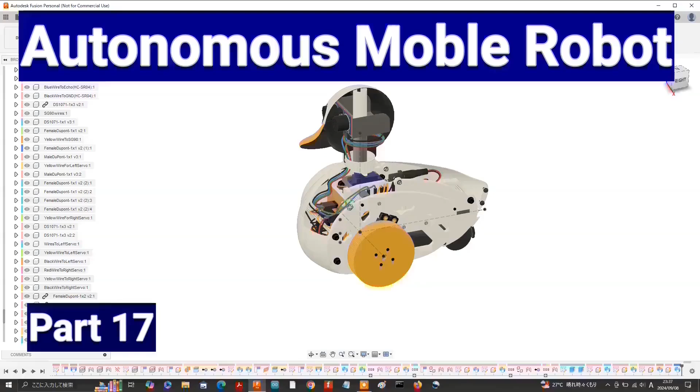Welcome back to part 17 of my DIY autonomous mobile robot building series. Today, using Fusion 360, we will create a 3D model of an HC SR04 holder and rotatably mount the HC SR04 holder so that it can turn to the left and to the right.

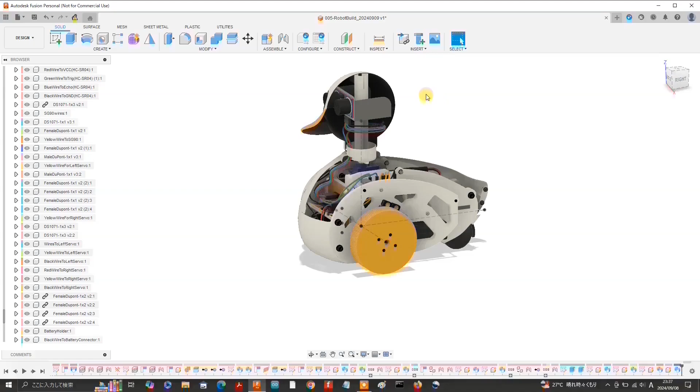Carrying on from part 16, our next mission is to get the HC SR04 to rotate with the servo horn of the SG90 micro servo. If we go to the SG90 in the browser, open up the joints folder, which unlike in this footage is inside the relationships folder if you're running the latest version. Right click on Revolute and select animate joint relationships.

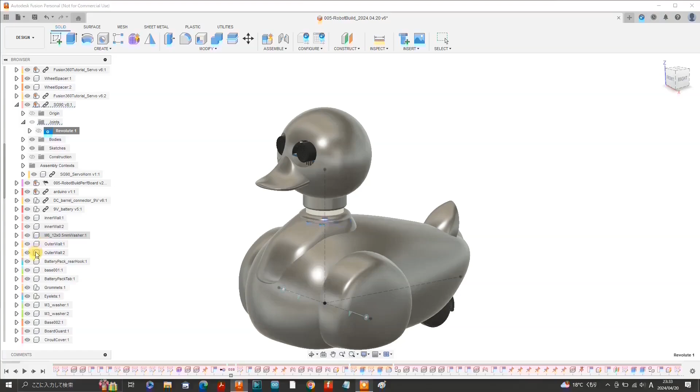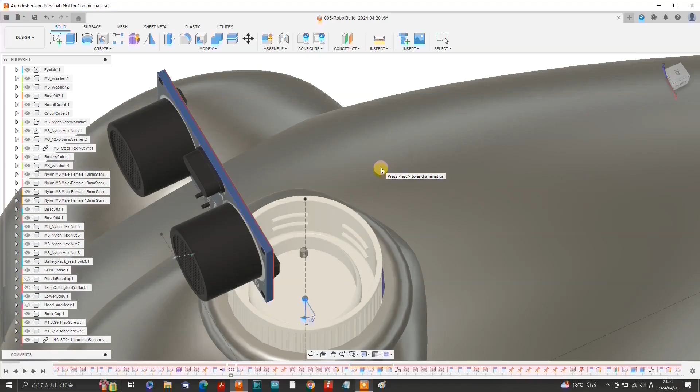So the SG90 micro servo is rotating as it should, but the HC SR04 together with the head remains stationary. Let's hide the head and neck and take a closer look. Hide the plastic bushing. The bottle cap is not rotating together with the servo horn of the SG90. The screws which penetrate through the bottle cap are rotating together with the servo horn as though the base of the bottle cap is made out of liquid. This is because the bottle cap is only sitting on top of the servo horn and is not joined onto it properly. So the footage has jumped ahead with the SG90 micro servo isolated.

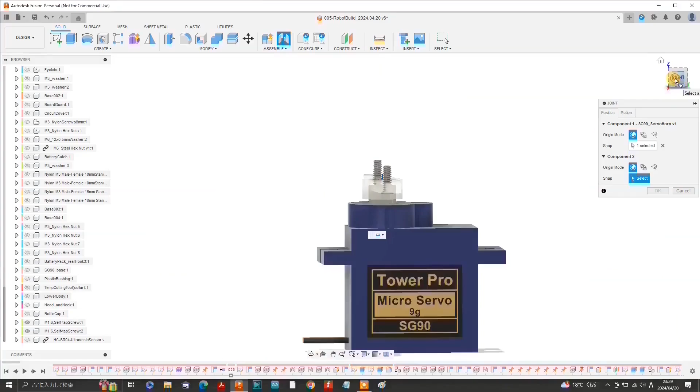Go to Assemble and select Joint. Then select the center snap point at the rotational center of the servo horn on the plane that lies on the top surface of the servo horn. Then swivel the SG90 to a lower angled view, unhide the bottle cap, and select the central snap point on the underside of the bottle cap.

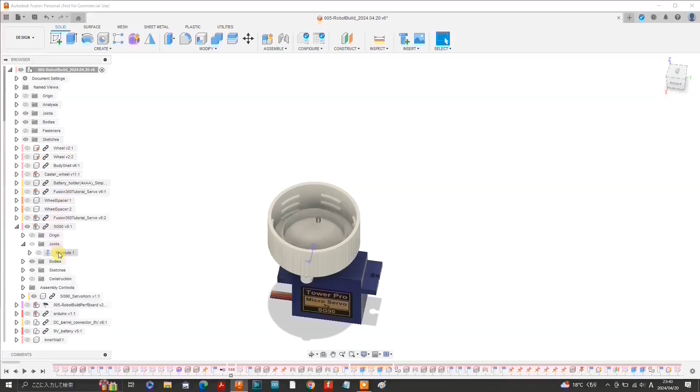Hit OK. Let's go to the Joints folder and label the newly created joint horn to bottle cap. Hide the joint, go back down to the SG90 in the browser, right click on Revolute and select Animate Joint Relationships. And there we can see the bottle cap is now rotating together with the rotating servo horn. Here the footage has jumped ahead with the SG90 micro servo unisolated.

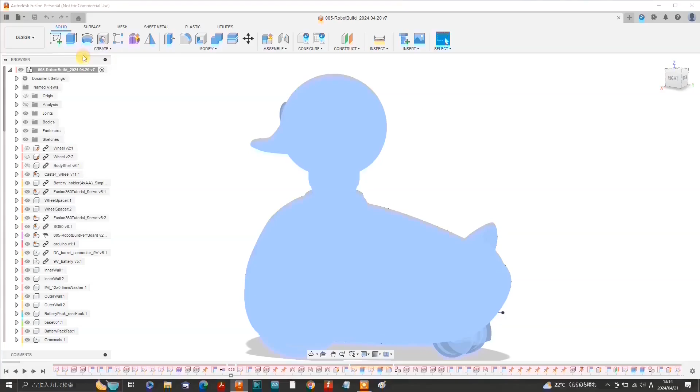So the next step is to create an HC SR04 holder. Create a new component and label it HC SR04 holder. Move to the rear view by selecting back on the view cube, and here we have the rear side of the HC SR04. Select new sketch and then select the rear face of the HC SR04.

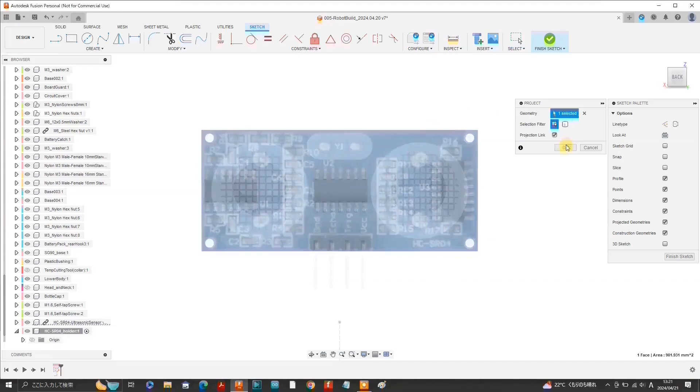Press P to project and select the rear surface of the HC SR04 to project the shape of the rear surface, including each mounting hole at each corner. Select the circle tool and sketch a 7mm diameter circle centered at the top left projected mounting hole, and do the same at the other 3 projected mounting holes.

Grab the line tool and sketch a line parallel to the long side of the HC SR04 at an arbitrary length, but longer than the width of the HC SR04. Then use the tangent tool to make the line segment tangent to the 2 circles, and use the coincident tool to make each end point of the line segment coincident with each circle. Do the same for the other 3 sides of the HC SR04.

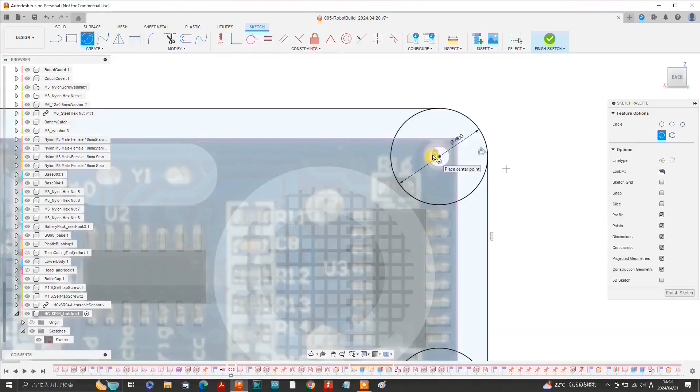Select the circle tool again, go to one of the corners and sketch a 3.5mm diameter circle centered at one of the mount holes. Do the same at each of the other corners.

Next, zoom up to one of the corners, select the line tool and sketch a vertical line from the top edge to a position just past an approximate tangent position relative to the 3.5mm diameter circle. Grab the tangent tool and make this line segment tangent to the 3.5mm diameter circle, and then use the coincident tool to make the end of the line segment coincident with the circle.

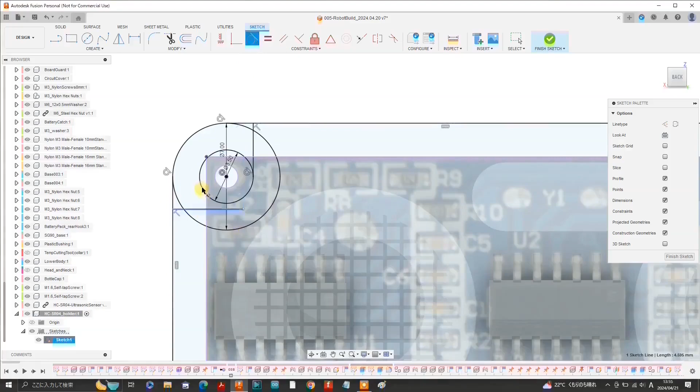Select the line tool again and sketch a horizontal line from the left edge in the same manner, and use the tangent tool and the coincident tool again to make the horizontal line segment tangent to and coincident with the 3.5mm diameter circle. Then do the same at each corner.

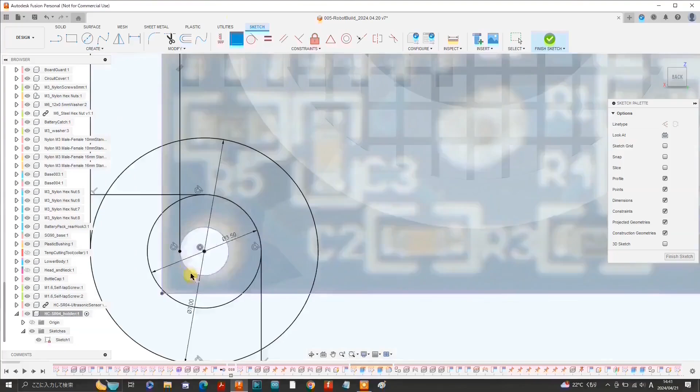Here the footage has jumped ahead. I have started by sketching a line segment close to a pair of projected mounting holes, using the tangent tool to make the line segment tangent to the pair of mounting holes, and using the coincident tool to make each end of the line segment coincident with each corresponding mounting hole. Do the same with the other pairs of projected mounting holes and finish the sketch.

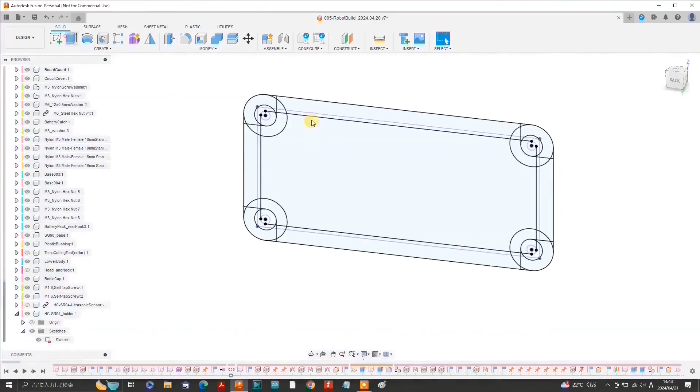Hide the HC SR04, select Extrude, and proceed to select all the various portions that will constitute the holder frame of the HC-SR04 holder. Extrude by 0.5 millimeters. Okay, let's unhide the HC-SR04.

Here the footage has jumped ahead to where we have a section analysis in the lateral plane or XZ plane, here at a distance of 18.5 millimeters along the y-axis from the origin.

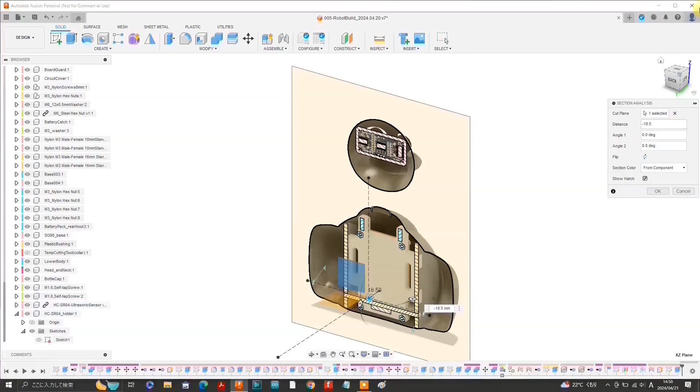As you can see, the 4-pin header near the bottom interferes with the holder frame, so let's make a notch out of the frame to accommodate that.

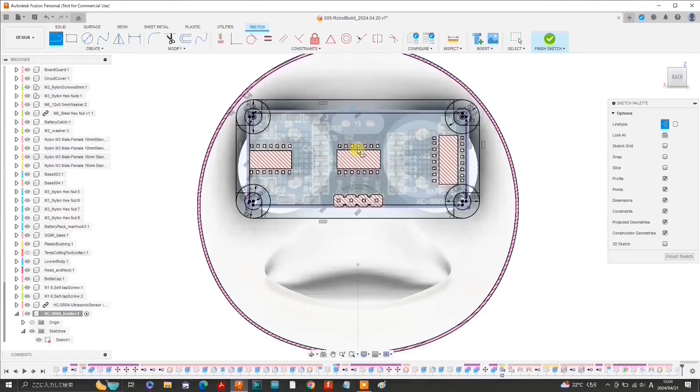Unhide the sketch and right-click and select Edit Sketch. Select the line tool, change the line type to Construction, and sketch a vertical construction line down the center, right down to the bottom edge of the projected perimeter of the HC-SR04.

Change the line type back to Solid and sketch a horizontal line segment along the bottom edge to the left, and set the length to 5.1 millimeters. Sketch a short vertical line from there to the lower rectangular opening edge.

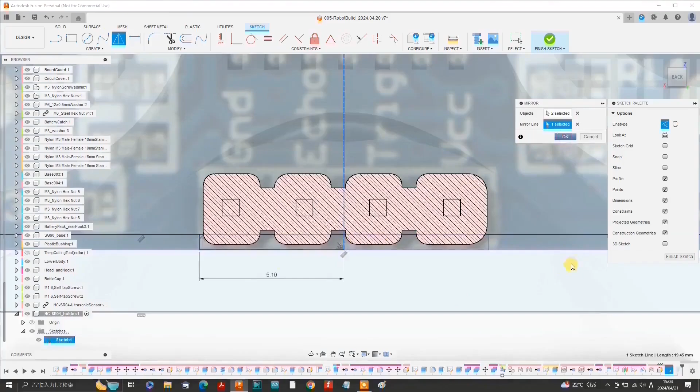Then use the mirror tool to mirror the horizontal and vertical line segments by selecting both of these lines as objects and selecting the vertical construction line as the center line. Finish the sketch. Hide the section analysis, hide the head and neck component, and hide the HC-SR04.

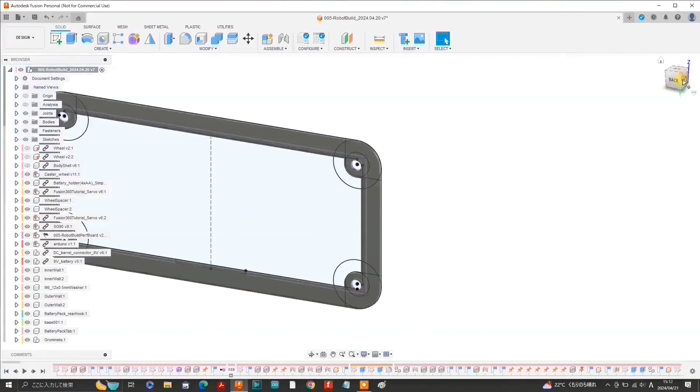I tried to extrude or cut out the notch by selecting the area defined by the line segments, but the sketch itself is located on the other side of the original extrusion, so we first need to turn the design around before selecting the area to be cut. Select the area of the notch and extrude as a cut operation by 0.5 millimeters.

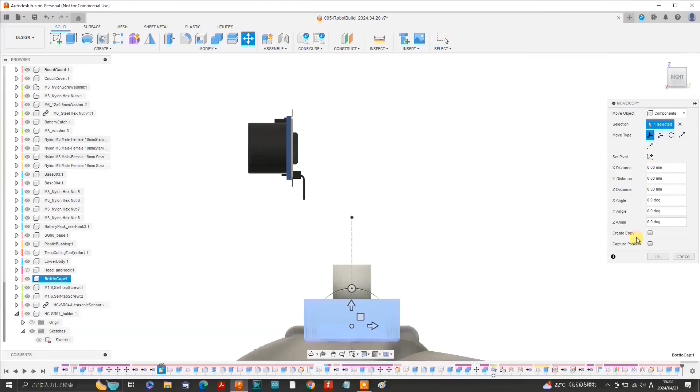Hide the sketch. Here the footage has jumped ahead with the HC-SR04 unhidden and with the Move Copy tool activated on the bottle cap. So I initially created a copy of the bottle cap as a supporting surface for the HC-SR04 holder. However, I ended up not being able to use this extra bottle cap due to space restrictions, which I will show you why very soon.

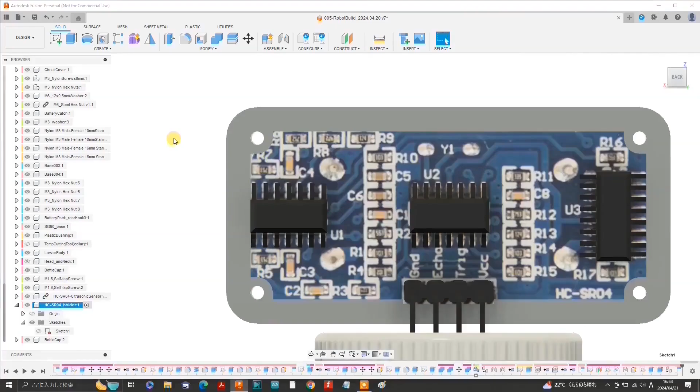Go back to the rear view, zoom up a bit and activate the HC-SR04 holder. Select the frame we created earlier and create a new sketch. Press P to project. Select the frame to project the entire frame we have sketched. Select the top face of the second bottle cap and hit OK.

Select the line tool and sketch a vertical line from the start point of this curve down to an arbitrary point lower than the top of the bottle cap. Then sketch a horizontal line on the left side that crosses this vertical line.

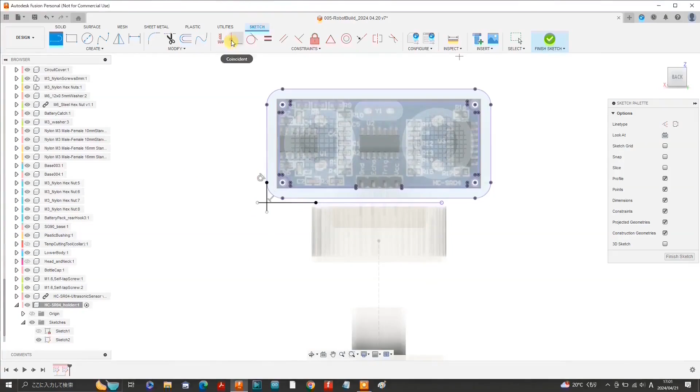Then use the coincident tool to make the left horizontal line coincident with the vertical line. Then do the exact same thing on the lower right side. Select the line tool again and sketch a 0.5 millimeter line inward from this point where the top left outer curve starts.

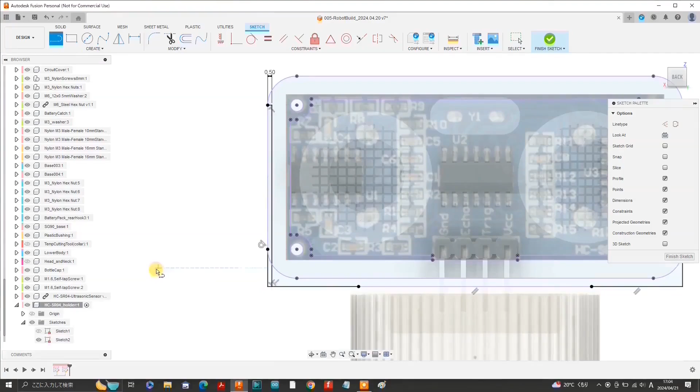Select the line tool again and sketch a vertical line from the end of the 0.5 millimeter line segment down to the lower horizontal line we have just sketched. Then do the exact same thing on the right side.

Next, change the line type to construction and sketch a 0.5 millimeter construction line from what will be the bottom of the HC-SR04 holder. Select the line tool, change the line type back to solid, and sketch a horizontal line from the top of the 0.5 millimeter construction line we have just created over to the left side.

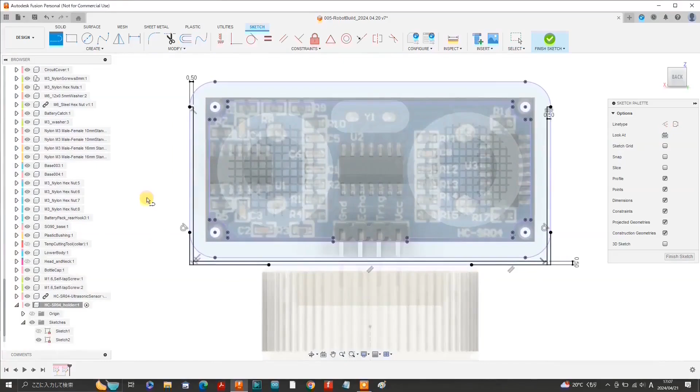Finish the sketch. Select the sketch profile that defines the right side wall. Select the extrude tool and continue selecting the profiles of the HC-SR04 holder to be extruded. Then extrude by 40 millimeters.

Activate the main design. I forgot to activate the HC-SR04 holder when I extruded the frame body. As you can see, when we hide body 13 in the root or main folder, the frame around the HC-SR04 disappears. So this is the body we need to move to the folder for the HC-SR04 holder.

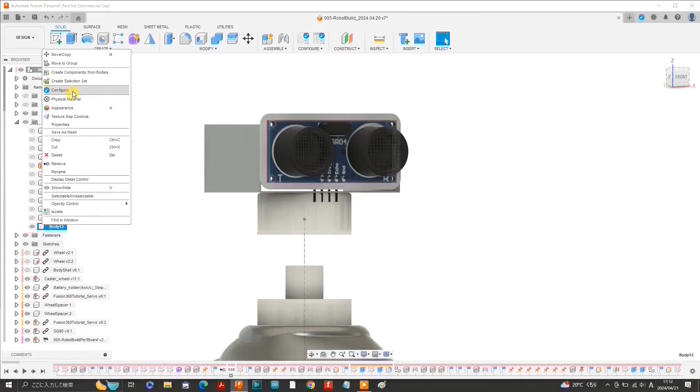Right-click on body 13 and select Move to Group. Scroll down to the Bodies folder of the HC-SR04 holder. Select Target Group in the Move to Group palette. Then select the Bodies folder of the HC-SR04 holder. Then hit OK, and there we can see the body added to the Bodies folder. Unhide Sketch 1 and Sketch 2.

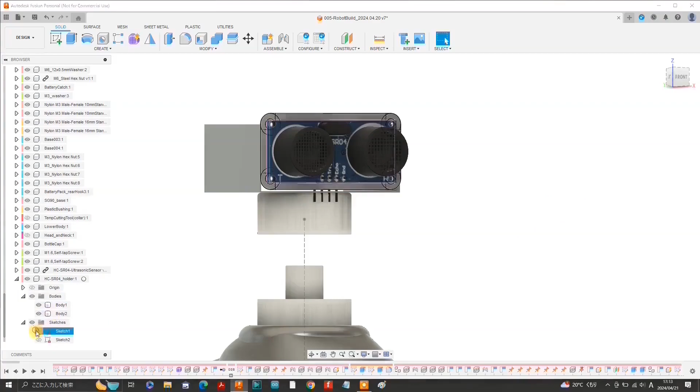Change to the front view and activate the HCSR04 holder component. Select Extrude and select the remaining profile portions at the lower end of the frame defined between the frame on the base and sides, and extrude by -0.5 millimeters. As you can see in the palette, the operation has automatically changed to join, so we can just hit OK.

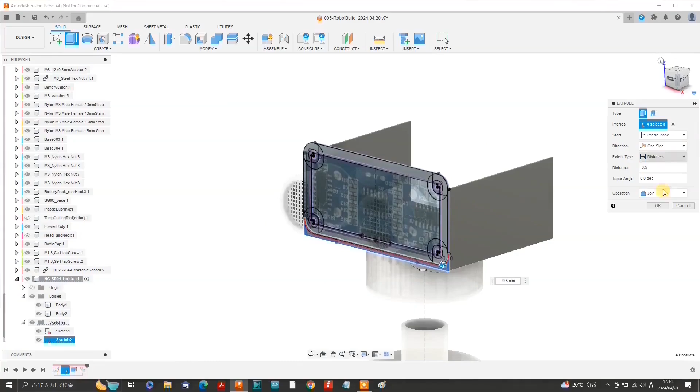Hide Sketch 1 and Sketch 2 of the HCSR04 holder and activate the main design. Select the corner edge defined by the vertical front wall or frame and the horizontal base. Select the fillet tool and apply a 1mm fillet and hit OK.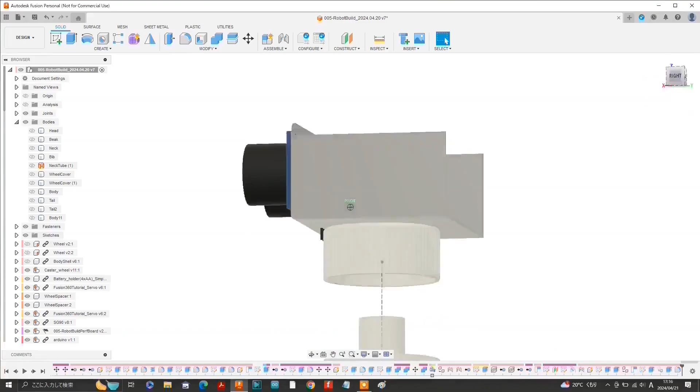Next, zoom into the inner corner edge on the inner side, apply a 0.5mm fillet and hit OK. Select each top rear corner edge of the side walls, select the fillet tool and apply a 10mm fillet to those corner edges.

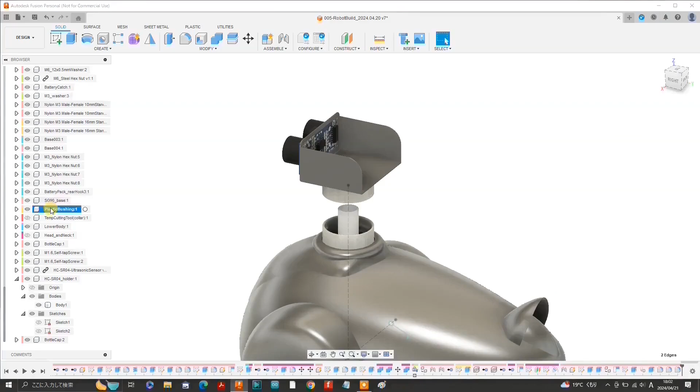Before we carry on, let's make sure the plastic bushing will rotate with the bottle cap and servo horn by joining the plastic bushing to the bottle cap. Right click on the plastic bushing in the browser and isolate the plastic bushing, and use the joint tool to join the center of the bottom of the plastic bushing to the center of the inner side of the bottle cap.

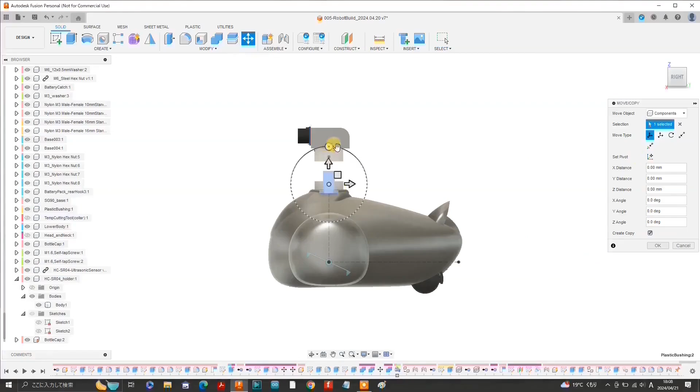I label the joint bushing to bottle cap, then unisolate the bushing. Select the plastic bushing in the browser, select the Move Copy tool, and check Create Copy on the Move Copy palette. Rotate the copy of the plastic bushing 2 by 180 degrees.

I actually hit return, but I could have also continued as I was. Move plastic bushing 2 up a bit. Just hit OK, because that is probably the most we can do with the Move Copy tool. Then right click on plastic bushing 2 and isolate it.

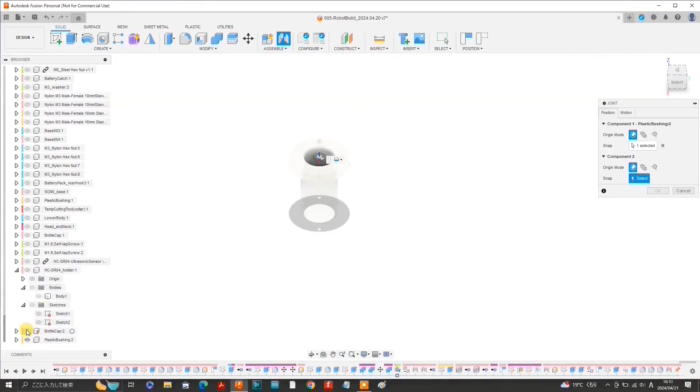I use Joint from Assemble to join the top side of the upside down plastic bushing 2 to the inner side of the top bottle cap. However, as I mentioned earlier, I ended up not using the top bottle cap, as you'll soon see. Right click on plastic bushing 2 and unisolate it.

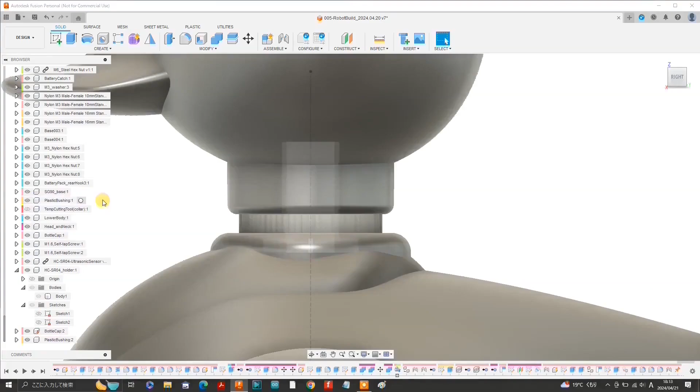Here the footage has jumped ahead a bit. Unhide the head and neck, and I need to unhide plastic bushing 1 in the footage here. Unhide the section analysis. Unhide the front to rear cross section that we have previously made.

Zoom up to where the two plastic bushings meet, and I think you can see that the two ends of these plastic bushings interfere with each other. Select Measure from Inspect and measure the distance between each end of the plastic bushings, and we get a distance of 0.836 millimeters, which is slightly smaller than the thickness of the top surface of the bottle cap.

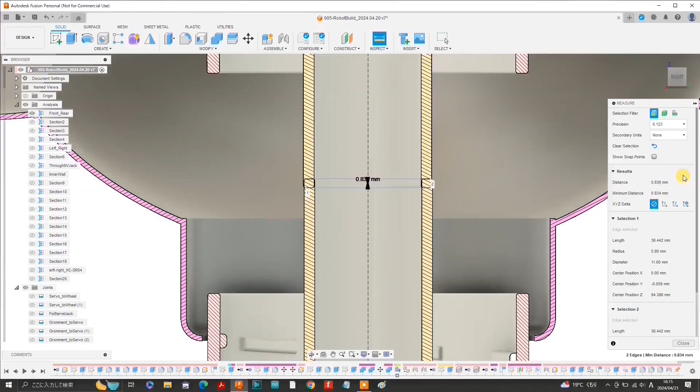Here the footage has jumped ahead, in which the second bottle cap has been removed and plastic bushing 2, which was joined to the undersurface of the second bottle cap, has dropped down to an arbitrary vertical position. Hide the section analysis and hide the head and neck component.

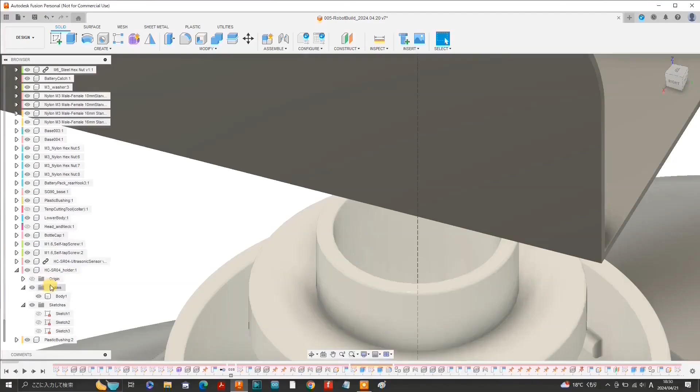Here the footage has jumped ahead and the camera has sped up while showing plastic bushing 2 being directly joined to the undersurface of the HC-SR04 holder using the joint operation from Assemble.

So zooming up to the upper and lower ends of the respective first and second plastic bushings, we can see a tiny gap, which is probably a perfect amount of clearance. I hid the joint and labeled it bushing to HC-SR04 holder.

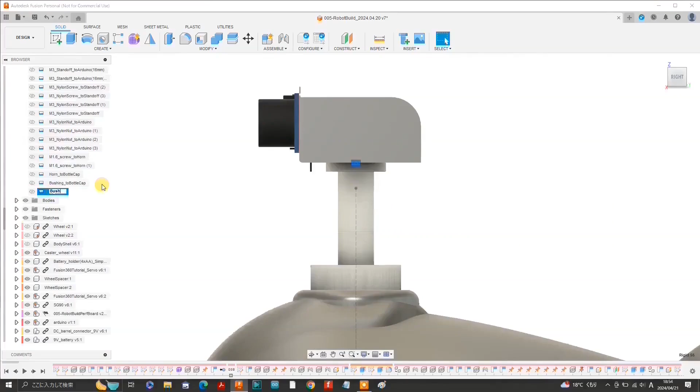Now let's create a connector tube that will integrally connect the two plastic bushings together. Create a new component and label it connector tube. Navigate to the top view, select a new sketch, and select the XY plane.

Select the circle tool and sketch a 12mm diameter circle on the origin. Then sketch a 14mm diameter circle and finish the sketch.

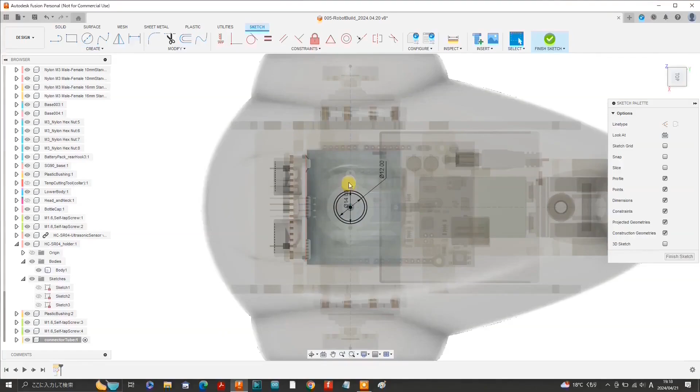Activate the main design, select Measure from Inspect. Measure the distance between the flange portion of the upper plastic bushing and the flange portion of the lower plastic bushing, and we get a distance of approximately 40.6 millimeters.

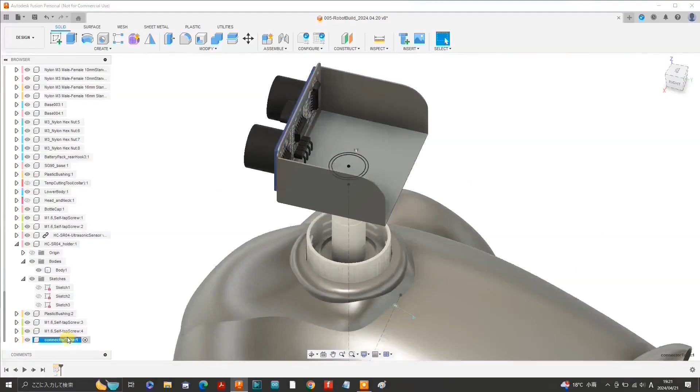So activate the connector tube, then right click and isolate it. Select the area defined between the 12mm and 14mm diameter circles. Select the Extrude tool and extrude by 40mm. Select the entire connector tube and add a fillet of 0.1mm for each circular edge.

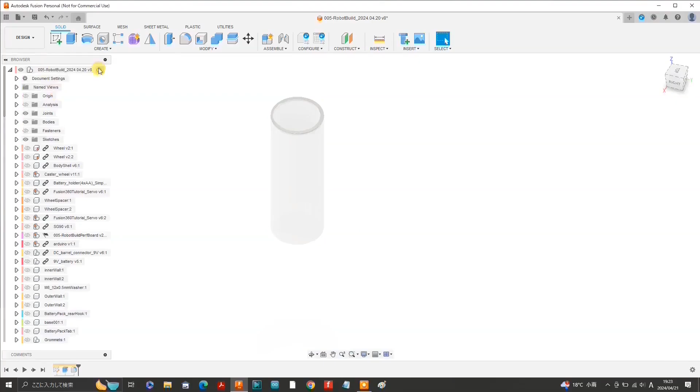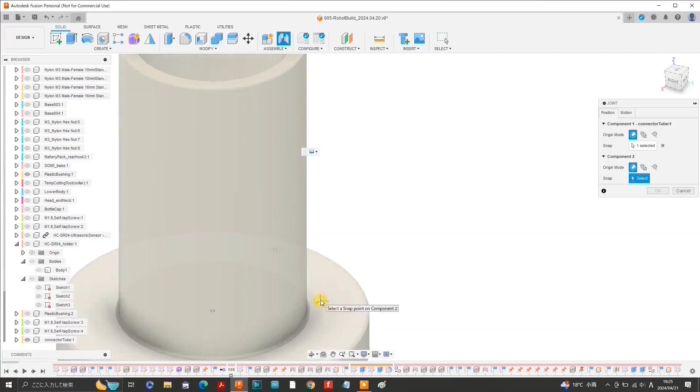Activate the main design. Let's go down to the bottom end of the connector tube and select the Joint tool from Assemble and select the central snap point on the plane that is defined on the end of the connector tube. Unhide plastic bushing 1, which is the lower plastic bushing, and select the central snap point on the plane that lies on the top face of the flange. And there the connector tube glides into place.

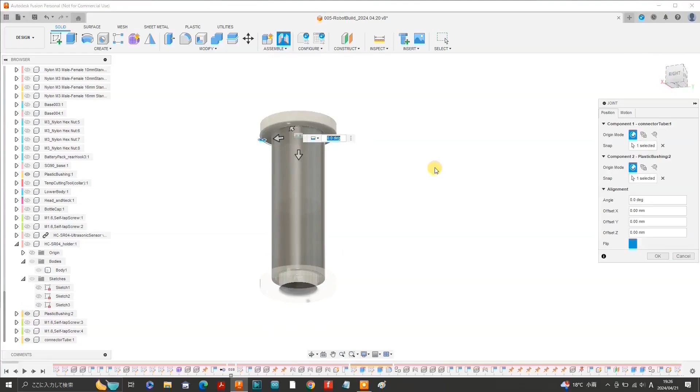Then use the Joint tool again and select the central snap point at the top of the connector tube. Unhide plastic bushing 2, and likewise select the central snap point on the plane that lies on the underside of the flange of the plastic bushing. Upon doing so, we can see that a slight clearance exists between the top of the connector tube and the underside of the flange of the upper plastic bushing.

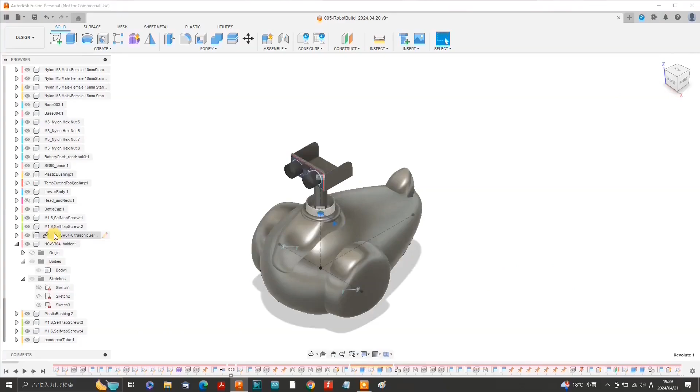Now go to the connector tube in the browser, right-click and unisolate it. Let's just hit Home, scroll to the HC-SR04 ultrasonic sensor in the browser, right-click and isolate it. Turn the HC-SR04 around to the rear side and select Joint from Assemble and select the central snap point at one of the mounting holes.

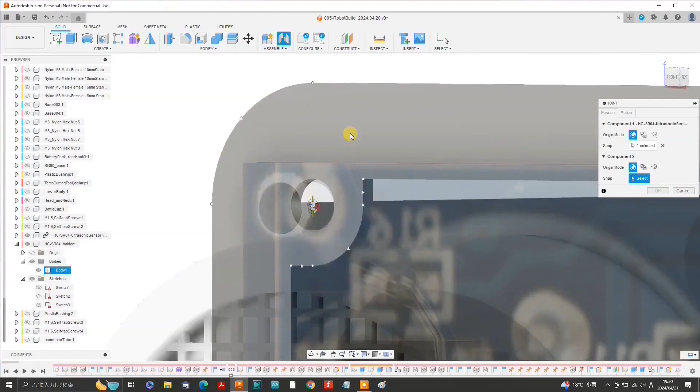Unhide the HC-SR04 holder, rotate the design and zoom up to a corresponding mount hole of the HC-SR04 holder and select the central snap point on the plane on the front surface of the HC-SR04 holder. This mounts the HC-SR04 onto the HC-SR04 holder. Right-click on the HC-SR04 in the browser and unisolate it.

Here I have labeled the joints between the connector tube and the upper and lower bushings, and I have also labeled the joint between the HC-SR04 and the HC-SR04 holder.

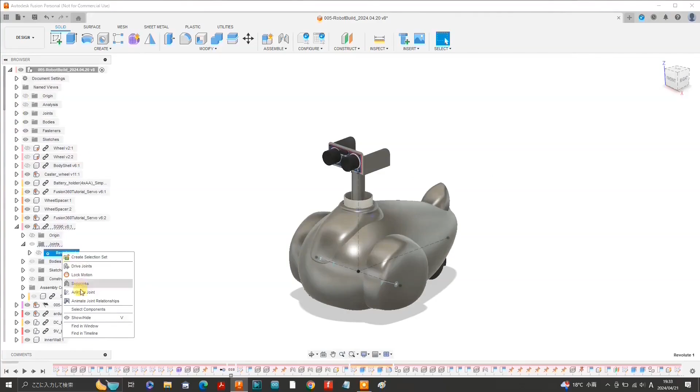Close the joints folder, right-click on Revolute in the SG90 and select Animate Joint Relationships. Now the HC-SR04, the HC-SR04 holder, the plastic bushings and the connector tube are all integrally rotating with the left and right rotation action of the SG90 micro servo.